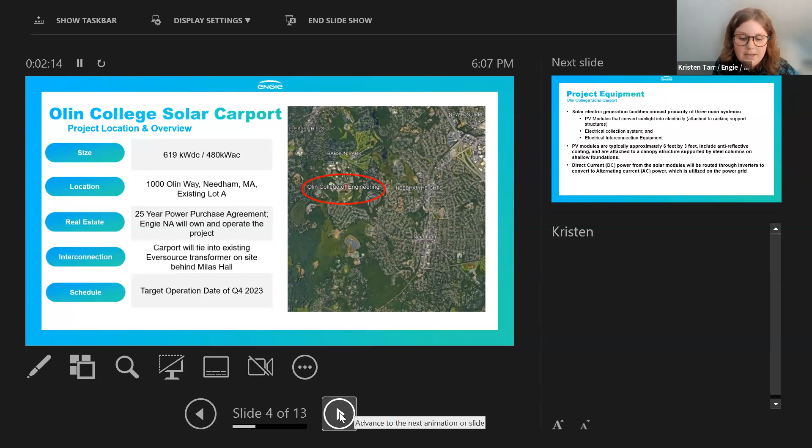So we're really excited about this project. Olin is really excited about this project. This is going to be a really big pillar of sustainability on the campus, and it's going to have interactive components for students to use the real-time data and include it in the learning curriculum.

The project is going to have PV modules, a solar racking system, as well as our interconnection equipment. We're going to use anti-reflective coating on our panels and steel columns for our racking, and we'll feed the power through to the transformer behind Milas Hall.

It's going to be a living classroom for students, allowing generation of clean and renewable energy for Olin College. This project is in line with the Massachusetts Climate Action Plan, Needham's Climate Action Plan, and Olin's Climate Action Plan, both still under development, and this is a great way to kick those off. It also provides covered parking to students through the weather in Massachusetts, and improves stormwater quality by capturing precipitation before it hits the pavement.

I'll turn it over to Phil to present on our wetlands.

Sure, can you hear me okay? Yes, we can. Okay, great. SWCA had a wetland scientist delineate this site in January 2023. This is a delineation map that was in the application.

The two wetland areas in green are BVW. We refer to them as wetlands 1 and 2, with 1 being the most south and 2 being to the east. We also field-estimated an isolated wetland—we didn't have permission to survey it, and it's actually within the town of Wellesley, but within 100 feet of our project site. That's the one in yellow, to the west.

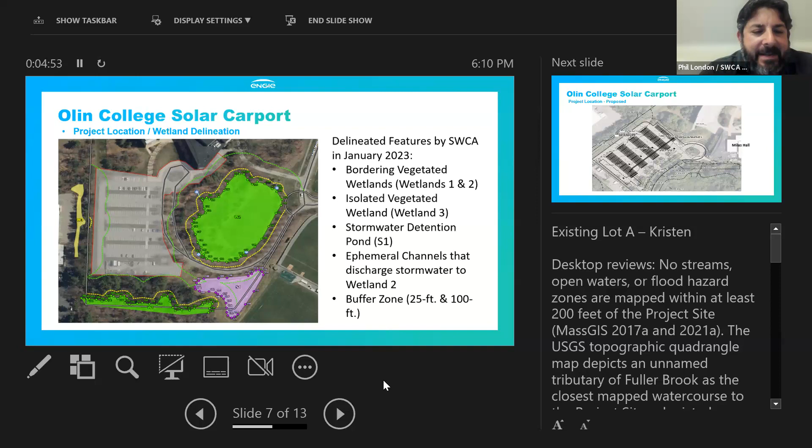So the 25 foot is the yellow dash, 100 is the green dash, and the purple is the detention basin. Correct. All right, got it. Trista, I don't know if I can actually change the slide—can you just hit the next one?

Okay, so this is the actual plan for the project. You can see the solar carports, there are 5 of them in the parking lot. Associated with that, there's going to be some trenching for conduit, which also goes to Milas Hall. You can see maybe a 35-foot corridor where the roundabout is—yes, exactly right there. So there's going to be a trench going right down the center of that, which serves as the tie-in to the existing electrical system.

So, I'm sorry, the solar panels are over the existing parking lot, is that correct? The only thing that is not in the parking lot is this conduit we're just talking about, and that part is adjacent to a walkway—it's a grass area with landscaping.

So really, the primary reason we're here is because there are little bits that are in the 100-foot buffer zone—some of the carport in the parking lot on the northwestern extent. You can make it out on this plan, it just clips the edge of the carports. And in that landscaped area we were just talking about, a little bit is in the 100-foot buffer zone as well. I should note, we're not within 25 feet, and we're not within the 50-foot buffer zone that the local bylaw specifies. How close are you?

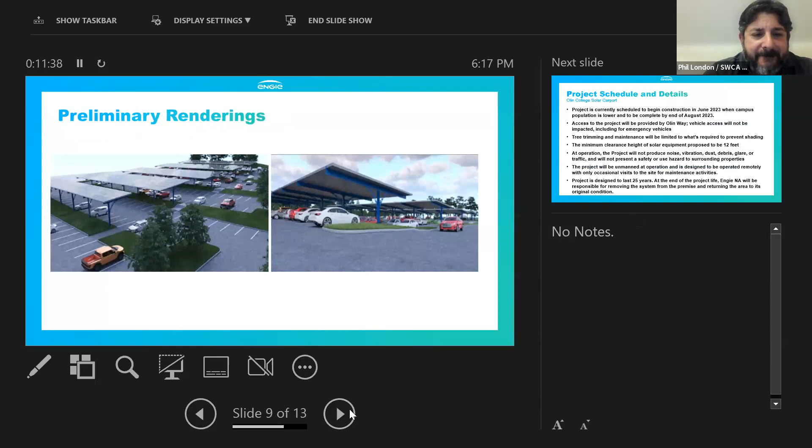So I know we have a couple other slides, but we may have kind of covered everything. That's kind of what the renderings would look like, the carport. Great. And this just talks about the project schedule. They are looking to start kind of in June and go through August.

Trying to see anything relevant. I talked about the stormwater controls, but we kind of already talked about that.

I did hear earlier that these solar panels are going to improve water quality, and I was curious how that was going to happen. Well, it's just that the carport will intercept the water before it hits the pavement, so that'll be connected into the stormwater system. So the carport, since it's a solar panel, will have a gutter system on it? Correct, they'll have a gutter system that'll collect it and convey the water into the existing system. So the point is it'll intercept it before it hits the pavement with all the pavement stuff. Great, okay.

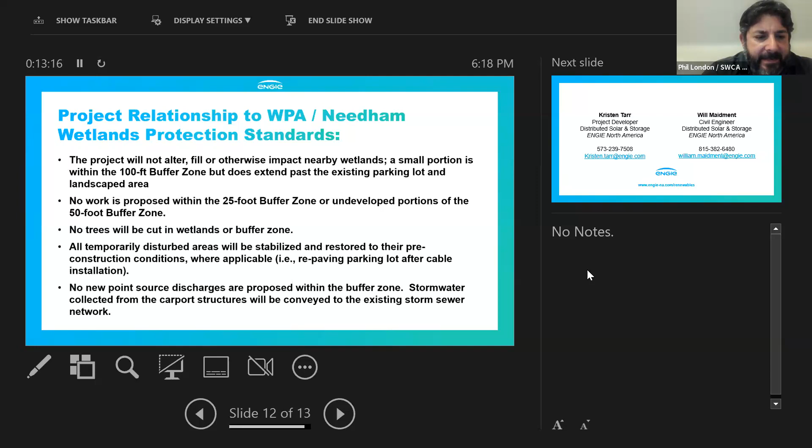And yeah, this is our last slide. It's really just reiterating everything we talked about. We're not going to be altering a resource area. We're going to be in the outer 100-foot buffer. There's going to be no trees cut into wetlands or the buffer zone. All temporary areas will be stabilized and restored to their pre-existing conditions. And there's going to be no new point source discharges associated with this project.

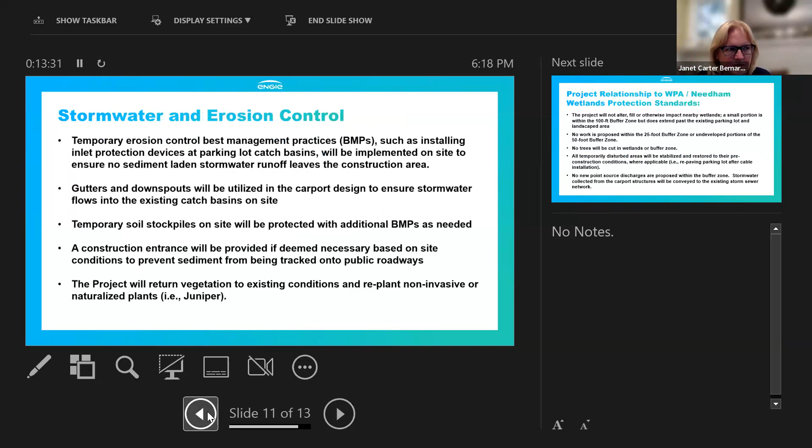Was one of these a photo of the area where the conduit is going to be dug in the buffer zone? There's no photo of that though, right? This is just a sketch that is aerial based. Okay.

Clay or Deb, I think Clay maybe went out or discussed this? Where's Clay? Oh, there you are. Do you have anything to add? And did you take any photos? I don't have any photos ready of the site. The work itself is pretty minor.

I think the RDA is fitting. The only concern was just about making sure that the stormwater is managed, that the outflow, I know you're directing them towards existing catch basins and that discharge already exists. But I think these are going over pervious islands, so just making sure there's no scouring or anything that's going to occur at the outflows due to any increased stormwater.

Does that make sense? We can't hear you, Phil. Are you talking? Yeah, I think Clay was just concerned about increased runoff going to the islands due to construction, so I was having trouble hearing a little bit. Just making sure that any increased stormwater from the newly installed carports, I imagine it would be relatively negligible since they're going over primarily a parking area, but since they are going over what appear to be pervious landscape islands, just making sure that we're not causing any scouring at the discharge point. So adding riprap or something if over time there is any scouring. So just monitoring of that outflow to make sure there's no long-term impacts.

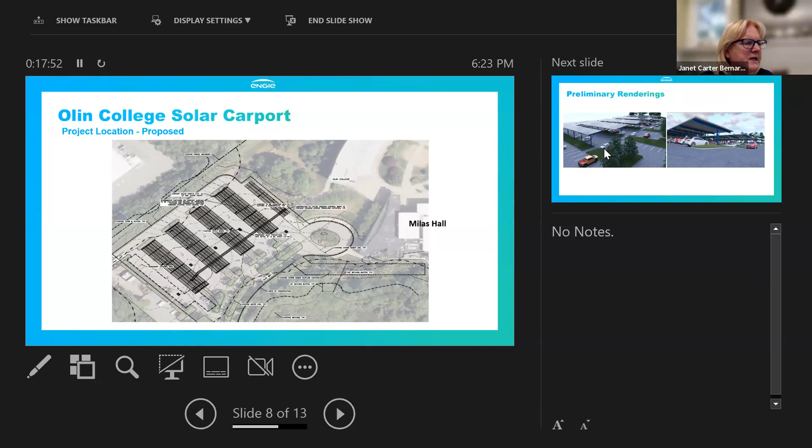Not hearing her. Who are you asking? Allison, she's having issues. Clay and I are trying to work with her. Did I get everybody else? And anybody in the audience have any questions, concerns or statements? There are no raised hands. Okay, and your team is satisfied? You've all said your piece?

My only concern is making sure that any erosion control, if needed, is there within that easement line. Because it's not clearly shown here, it might not be needed, but that's my concern. Okay, so everybody said their stuff, so Janet, yes.

How would it work with Wellesley? The applicant will need to go to Wellesley and do a similar process as this, asking them for a request for determination of applicability. If we issue a negative determination, they can do the work in Needham, but it's up to them to go to Wellesley for any work within Wellesley's jurisdiction.

Okay, did that make sense to the team? Phil, if you're talking, I can't hear you. Yeah. I've had this situation in the past, and I'll definitely follow up with Wellesley as to whether we actually need a filing when the work is not in this town.

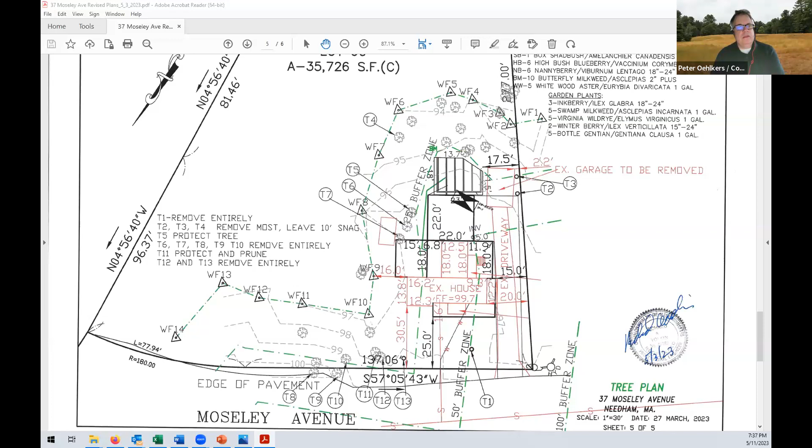I just was looking at a planting plan, on sheet 4 of 5. Oh, you see the legend. Maybe that's what I'm looking at. It's just the legend. Oh, you don't know where the plants are. Yeah, we talked about this before. We don't see the trees, we just see the legend.

Yeah, the trees were on there on the last plan. So, George, weren't they? Because we talked about that the last time too. So the trees, I had gone out to the site and identified some locations. They were on the past plan. I apologize that they weren't carried over. Yeah, we had brought that up the last time. Peter mentioned it before that there was just a legend and no new trees. So we definitely should show where the new trees are gonna go if you're gonna take away these other trees.

So those trees are all gonna be in the area off to the side, 25 foot off to the side. That was really the only area I could find that had the space for the trees.

Okay, Peter, we'll come back to you again in a minute. Stephen, anything about the deck?

Nothing about the deck. I'm wondering if there's a plan that shows, are we putting markers at the 25-foot no-disturb zone? We can do that.

I mean, a site like this, especially, this is a developer building it to sell to somebody, and the new homeowners are not gonna know anything about the wetland area.

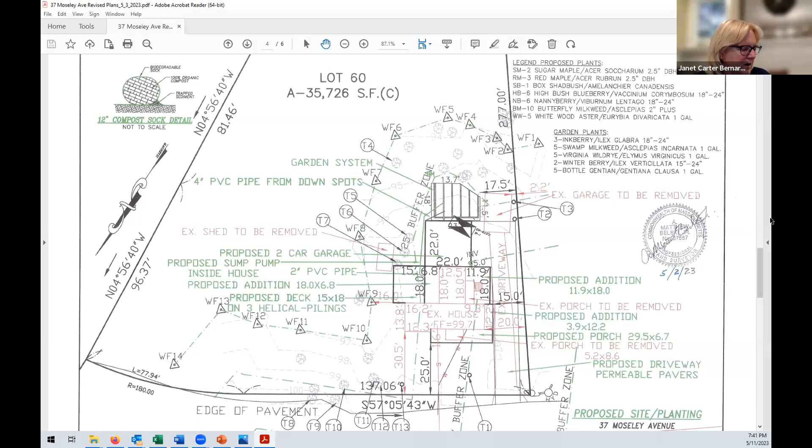They're in the wires anyway, they're really in the wires, and they're not that healthy. I think they were all Norway maples, maybe. I've kind of forgotten, I might be wrong.

But so we still need a plan, and then the rain garden is now moved outside. Do we have calculations for that rain garden, and has it been stamped by a professional engineer?

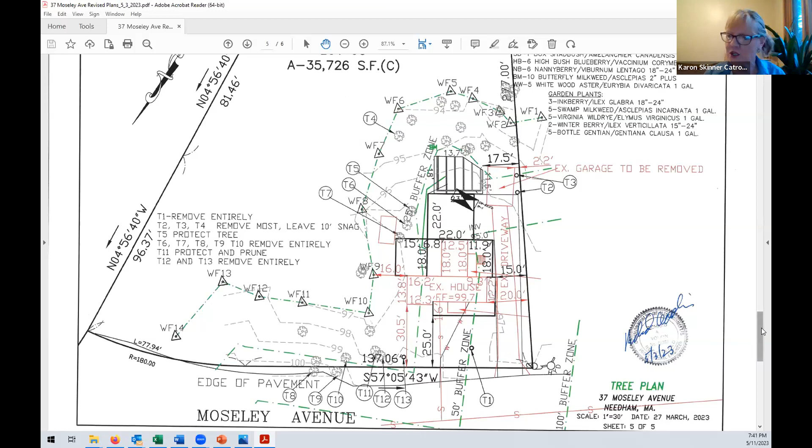Oh yes, that was Richard Volkin who stamped that, and he also did the soil testing. You asked at the last meeting who did the soil testing - he did it, and he's a soil evaluator.

Where are the... okay, so these are the calculations for changing the view. So sheet 3 of 5 is the soil test log, the rain garden system, the footprint of the building with the calculations.

We will do a double check on that. I think Dave is looking at that, and it's stamped by my engineer. So the impervious area has been confirmed, the erosion control line has been confirmed, soil testing got confirmed, the root zone is using...

You said the tubes for the garage. I believe that does make sense. Is the garage - so the grading for the garage - is it higher than the existing grade, so what will be the elevation of the garage?

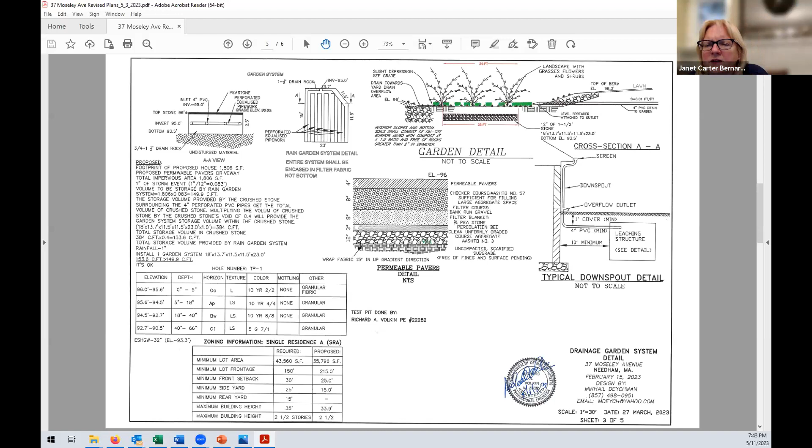Janet, to answer your question, yes, the garage will be higher than the existing grade. And in order to do the garage and protect the root system of the tree, what we're going to do is sonotubes on the back around where the roots are. Then on top of the foundation, that's going to be on the front and sides, we're going to do corrugated steel and then pour on top of that. So the roots underneath the garage will not be disturbed - we're trying to do as little impact as possible to that tree.

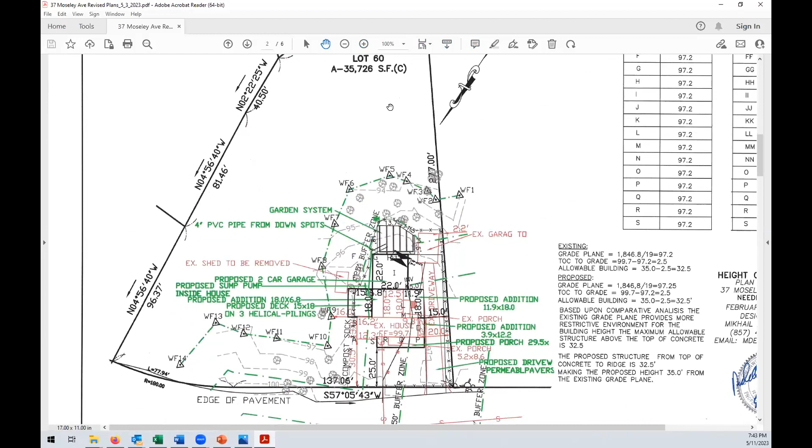Great, thank you very much for that. No problem, that's great. So did you say what you wanted to say there? Great, oh great, okay good.

I agree, second reading, okay. Revised plans are uploaded for review. So one thing that staff noticed was that the check you wrote for the fee waiver is dated January 2022, so we will need a new check for work within the 25-foot no disturb zone.

My guess is the commission will vote on it, but because of the amount of work that will occur there, that it's not just plantings, we will likely not waive that fee, so we will want a new check. So one thing Steve talked about was markers - putting markers at the 25-foot no disturb zone.

We have done different things for markers in the past - sometimes they are birdhouses, sometimes boulders, sometimes a fence, sometimes granite markers. You can tell us what you want for a marker, and we would like to see where those markers will be on this plan, because it does kind of zigzag around. From the commission's point of view, the 25-foot no disturb zone is where we would like these markers compared to anywhere else - is that a true statement?

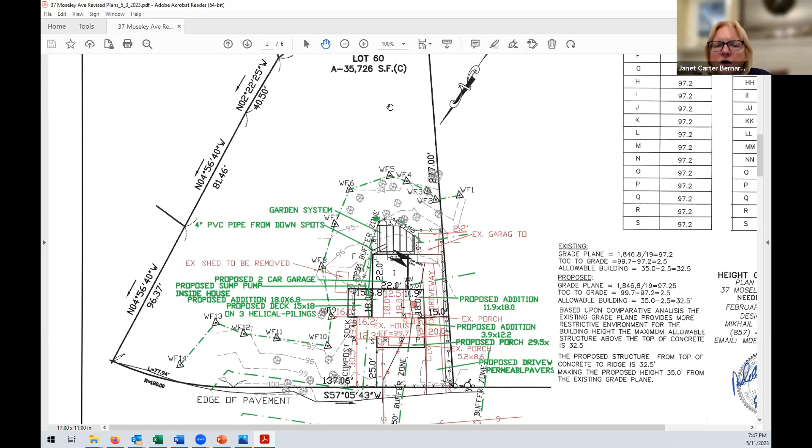And we just got the arborist report. So really, I think the plan is getting much closer. If we could just have markers and trees and plants underneath, and is there anything else?

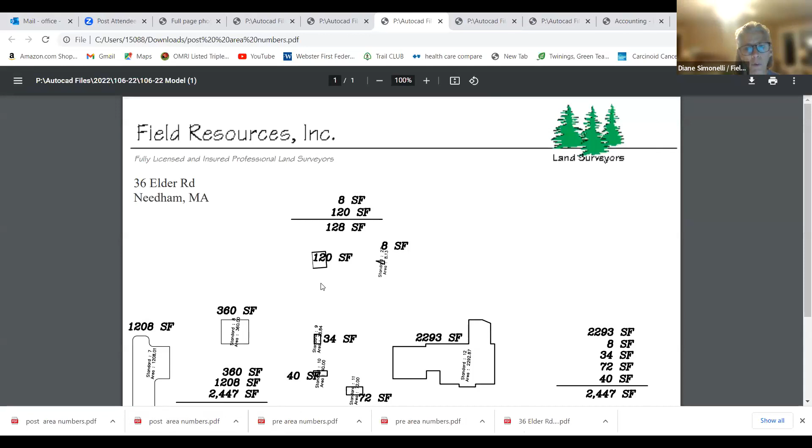And with that, we kind of broke it down a little bit more in the sense that we have the existing house minus the pervious patio and walks. We also have the driveway. This is existing or proposed now? This is the proposed.

So with that, we have the house at 2293. We added 8 square feet that we took off the house because that was actually in the buffer - we broke this down based on the 100-foot buffer to the BVW. 34 square feet is the bulkhead, 72 - honestly I forget what that is for - and then front steps or something, and another stoop in the back, and that comes out to 2447.

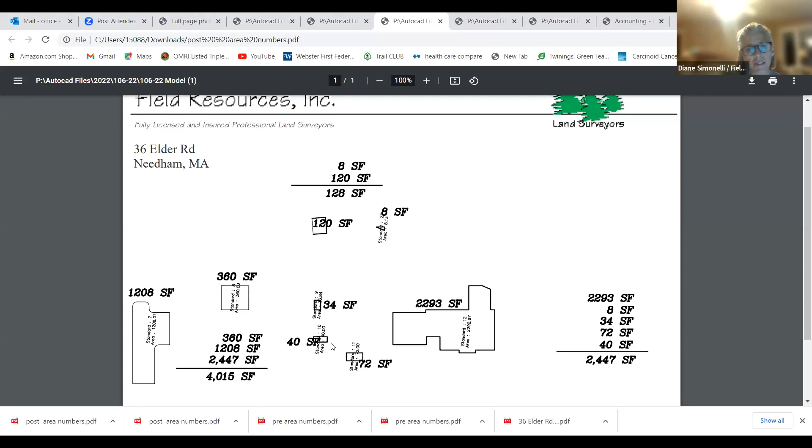So again, if we look at the numbers, let's go back. I'm sorry, that was a little confusing because I wasn't sure. You have two sets of numbers - can you identify which each one of them means again? Sure, let me just go back. I think we've understood this one.

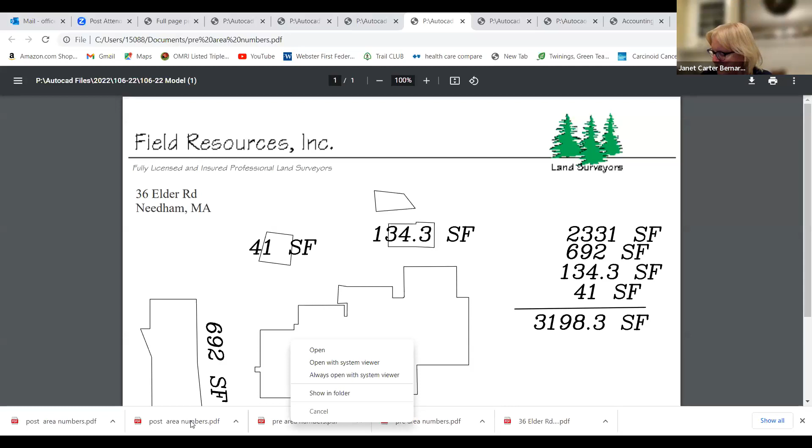Do we understand this one? Because it's 3191 existing minus the 41 that we don't agree with, so we're at... no, I didn't do that right. 3198.3. Well, it's not 3198 because you're subtracting 41. Right, so it comes to 3157.3. Okay, that's better. So existing, we have 3157.3. Got it, right.

So again, we go over here to these are the calculations for impervious in regards to house and structure. Is that proposed? This is correct, this is proposed. So you're... sorry, look, I'm sorry, you're right, I'm looking at the wrong list.

This one here is slightly different. This takes into account the original patio, including this patio, which again we've made pervious. So this was a previous calculation including the patio, which now is pervious. So the 360 is now pervious patio. Correct. And the 1208 is the driveway. But that's impervious.

No, that is not pervious pavers. The driveway also, no that is impervious. I'm sorry, I misheard you. Okay, yeah, so then we have...

So we have the house at 2293 square feet. Then let me just make sure I have my numbers right here. It seems like the calculation on the left-hand side, you would just be subtracting the 360. Is that correct? Right, I think.

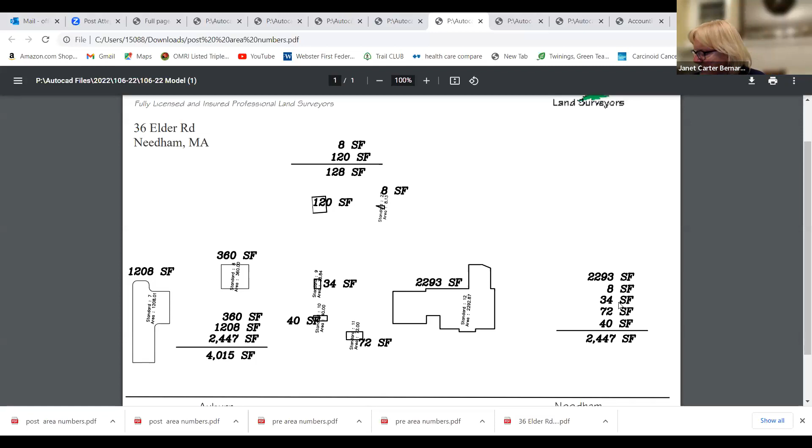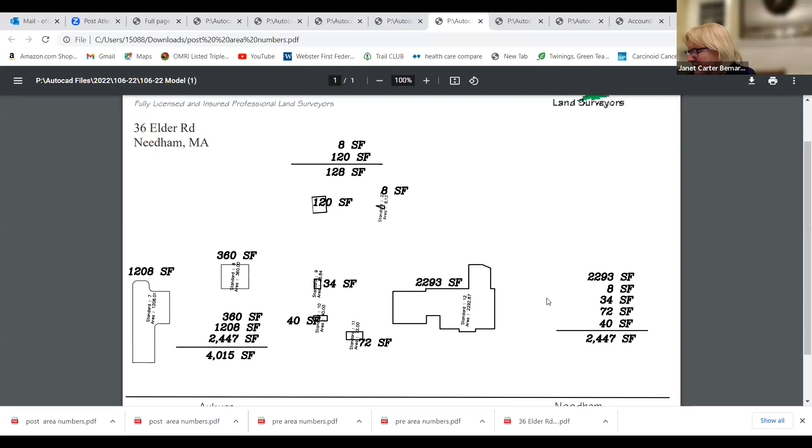Okay, so that's proposed, 3655. Correct, the existing was 3157. So the difference, is that what we care about now? Correct. So the difference is basically 500 square feet, 497.7. Does everyone agree with that? Yes, agree with that. Okay, so can we just say 500 to make our math a little easier? Sure, okay, so now what happens?

We have 500 additional impervious area. Right, so then we'll go to the plan that we have. The proposed plan had 470 square feet in this area. Additionally, we have this little part that was unvegetated, edge of lawn, approximately 500 square feet of area that will go back to naturally vegetated area. And Clay, is that the idea, they take whatever additional impervious area and give back 1-to-1?

Generally for redevelopment, when you're over 10% of the lot as being degraded, in this case impervious, we're looking at impervious numbers. But it's not degraded, I mean it's not 10%. Okay, so more than 10% of the lot is impervious or degraded? For impervious, I believe the regs bounce back and forth between degraded, which has a very finite definition, and previously developed. The way DEP handled the last appeal primarily stuck on impervious in a case like this. So we look at the net increase, it's over the impervious on the lot under existing conditions being over 10% of the lot size. I think about 16%.

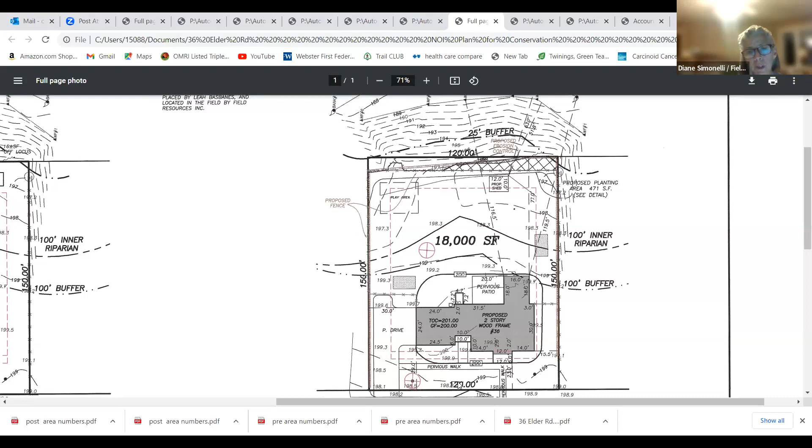So these are some of the items that can be removed from that calculation. But then the existing would also get removed from the calculation. So if you're gonna remove the proposed, you're gonna remove the existing, right? So could we just compare house to house?

So the argument being made now is that some of these areas in the current calculations for impervious surface are activities that would otherwise qualify as exempt minor activities. So I think what Diane is arguing is that if they removed the proposed shed and then came back in the future for the shed, it could come back as an exempt minor activity under a separate action, because it's more than 50 feet away from the mean annual high water.

But I think even if she does that, it's still currently impervious surface. So you cannot just take it away and say it doesn't exist if it exists - that's what I think. But if they took it away now and said okay, we're not gonna have that shed, so that doesn't count in the numbers.

And then they built this house, and then in 2 years they say we want to put a shed in, but the shed is now within the new 200-foot riverfront area, but it's closer than the existing impervious because now the old shed is gone. I don't think they're allowed to do that, are they?

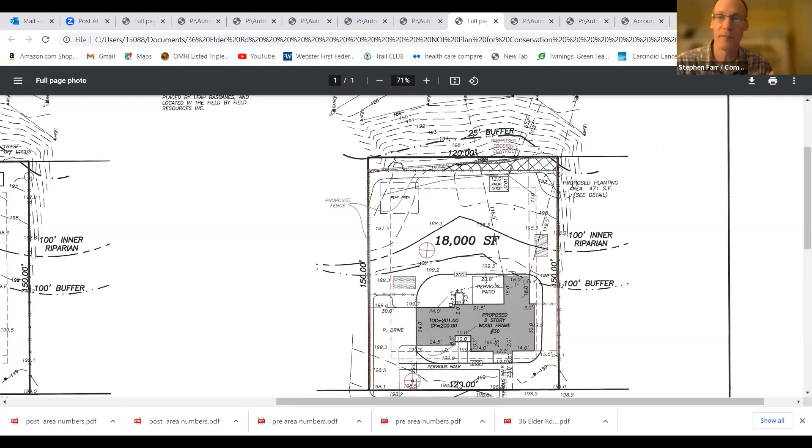Well, we can put monuments up on the fence. Yeah, we could put markers. Okay, so again, usually we put these markers at the 25-foot buffer, they kind of mean something. There's a different set of markers we're gonna use. Well, the markers aren't specific to the buffer. They say conservation land or something, don't they? Correct. All right, so I think we could put markers up, 3 markers, on the fence.

Because otherwise, what would you suggest? I don't have a good idea. They could do the same thing, take all those out. At least the markers give you some warning, right? As long as they're there.

And do we have, this is an order of conditions that would go with the land, right? It gets recorded somehow.

Well, that's one thing, honestly, as the board, I would love to see, when you record the order of conditions, it's obviously required, and I know the order is really what you're supposed to follow, but the plan, I feel, if you get an order, without bugging Debbie or Clay or other agents, it would be lovely if even an 8.5 by 11 sheet of paper is recorded with the order. Just for people, it doesn't have to be large scale, just because it goes along with the write-up, and most people don't read through the whole order, honestly. Right, right, I agree, you look at the picture. That's really a pretty good idea to do. Depending on the sheet we get, sometimes we'd have to make it small, but that's something we can definitely think about, and we'll definitely reference the plan in the order. Definitely, we just don't necessarily attach that plan, but that's not a bad idea.

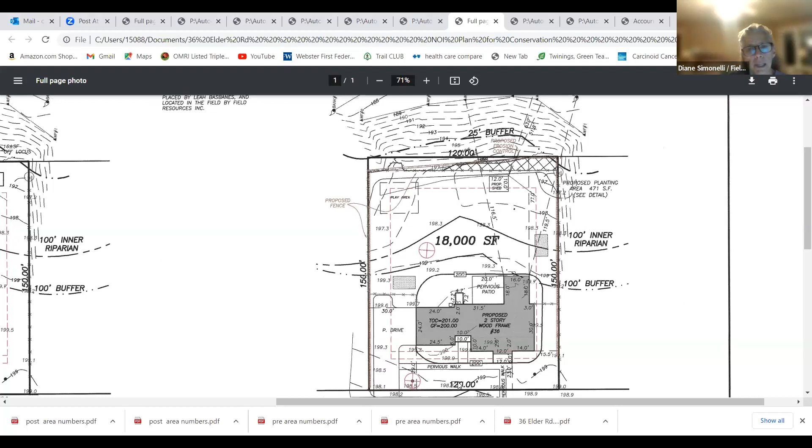Okay, every foot counts. Paulina, anything else? Sue? It sounds good. I would just like, if people are comfortable closing the hearing tonight, I would like to say we need a plan showing what this is, and I would like it to be at least 3 feet from where it is right now.

Okay, 3 feet. So if we condition a new plan, how many markers did you want? Just 3 on the fence? Yeah, a property line marker and one in the middle, and a straight line. Right, well, I'm gonna add a little bit, and I'll add a couple more plantings as well, to beef up that little notch out.

To the plan - I know it's been a little bit, I don't have it on my screen this evening, but you did get a planting plan. I can update that with the proposed planting area, a couple additional plantings, and I will show the placards as well. I'll put them on the plan.

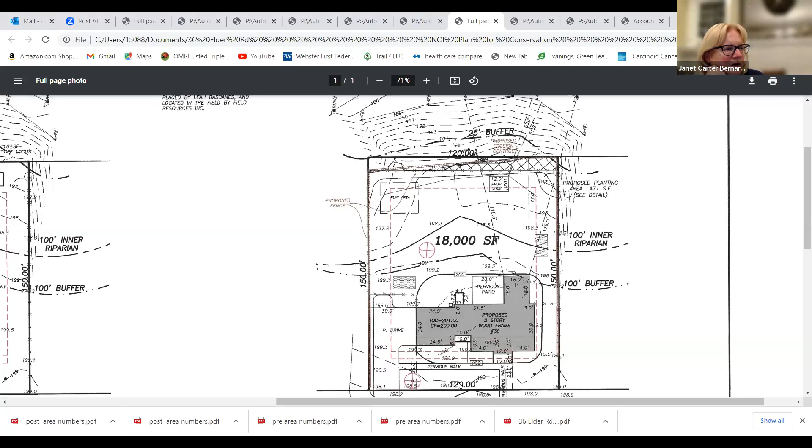All right, great. Anybody else? Anybody in the audience have anything to add about this? There are no hands raised. Okay, so anybody else, or are we ready to continue this hearing till May 25th?

I move that we continue 36 Elder Road to May 25th. I second. All in favor? Peter, aye. Paulina, aye. Sue, aye. Stephen, aye. Yeah, aye. Great, thank you very much, Diane.

Okay, and I do have one question, Deb. Is that meeting on Monday night for anybody or just commissioners? No, it literally says not for the public. So maybe you could hang out with the community. Yeah, I'll report back. Okay, again, thank you for your time this evening. Thank you, bye-bye.

Okay, where are we at? Oh, we did Olin. Okay, guess we are at 334 Meadowbrook Road, DP. Oh, we do not have a file number for 34 Meadowbrook Road yet. We can discuss this, open the hearing, but we cannot close the hearing. So is there somebody here?

I have my cheat sheet. Brett Reese - I'm here. Ah, Susan McCarthy - haven't seen. Did I get your name right, McCarthy? McArthur, yeah, and it's 34 Meadowbrook Road, not 334. Thank you, 34 Meadowbrook Road. I need somebody to be paying attention to what I'm saying. And Brett Reese is here from the homeowner. Great, thank you very much. All right, please have the floor.

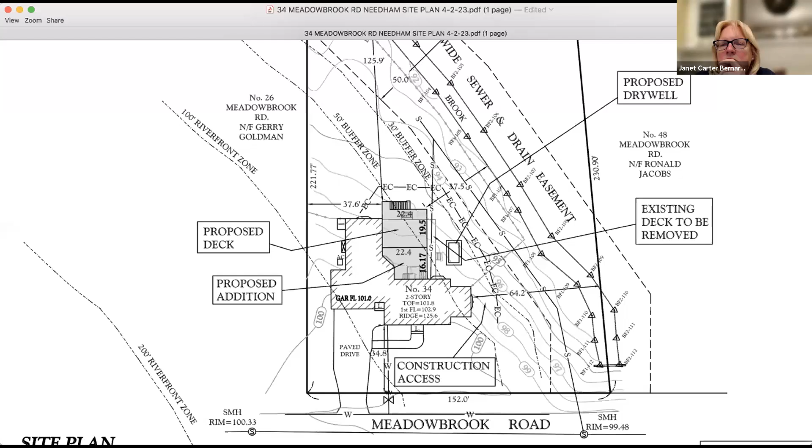I think it would help - would it be okay if I shared my screen? Yes, okay. Assume that you have heard this whole discussion we just had about riverfront and how that may or may not impact your project. Yeah, I've heard it. I'm sure we'll get to that.

Topography at the property gradually slopes down toward the river. The house is located around elevation 100 and the bank of Rosemary Brook is about at 92 feet. Rosemary Brook is a perennial stream. It flows through the back and the side of the property, and it is confined to a 10-foot wide concrete lined channel, as most of Rosemary Brook is. There are no bordering vegetated wetlands associated with it on this property.

So the proposed project consists of constructing a new addition and a deck off the back of the house. It's shaded here - the existing raised deck will be demolished. It's hard to see, but there's a slight line right there - that's where the existing deck is right now, and that's going to be taken down. A new 325 square foot addition is proposed off the back of the house, and a new 500 square foot deck is being proposed within the same footprint of the existing deck, as well as a little bit of lawn. The addition will be 2 stories with a full foundation, and no trees are proposed to be removed as a result of this project.

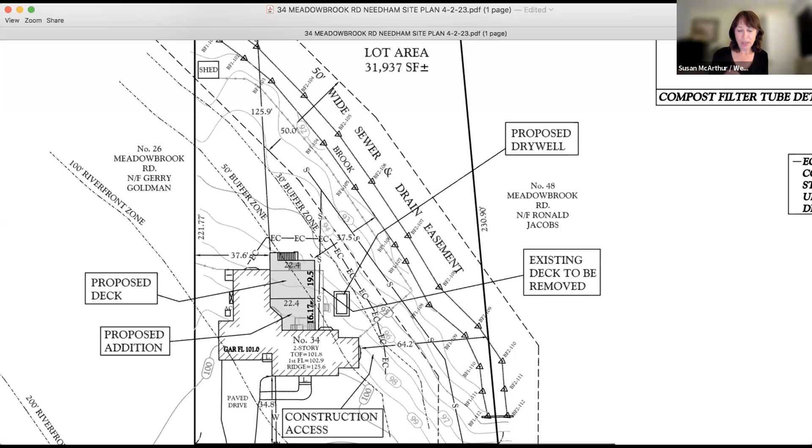A dry well is proposed to capture clean rooftop runoff from the new addition, and the gutters will direct the rooftop runoff to the dry well to provide recharge to the ground.

Are you only required to recharge the addition, or are you required to recharge any of the existing house? According to the Town of Needham stormwater regulations, there's a regulation that basically says if it's 25%, 50%, or 100%, depending on the size of the addition, depends on what you're required to do.

Oh, okay, that I would have to check on. I don't know, so check on the Needham stormwater regulations. I don't actually remember off the top of my head either, but I think if it's less than 25% of the existing, you just have to recharge the addition and not more than that. But if it's more, then you have to do more.

I believe that's correct, 25%. That they're less than 25%? Well, that's a stormwater requirement, 25%. So if it's under 25% of the existing structure, if the addition is smaller than that, then you only have to do the runoff for the addition. Okay, so you'll want to look into that.

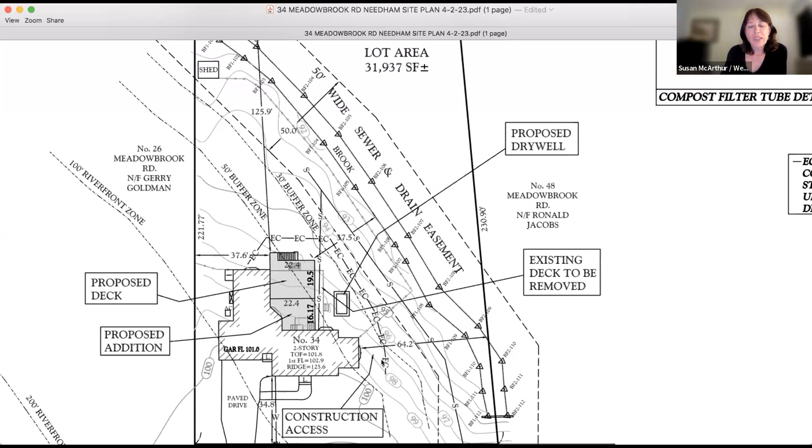Prior to any ground disturbance, an erosion control barrier will be installed. Construction access will be on this side of the house, just because it's kind of tight there, there's shrubs and whatnot. They'd probably have to take the fence down right there, but yeah, they would come in over here. I think that's it.

Anyone have any questions? So you're showing a 30-foot buffer. We have a 25-foot no-disturb zone. So we want to make sure your erosion controls and your access are outside that 25, that you're not disturbing anything within the 25. No, nothing's being disturbed within 25 feet.

I mean, if we could pull the erosion control barrier closer, but yeah, it looks like you should be able to be outside of the 25 foot, so no disturbances.

Commission members, we're also here. Stephen, do you have any questions? No comments.

Is there something like a waiver request? There is for work in the 50-foot. Right, so it's only a 25-foot. So the waiver should say 25-foot if you're working within the 25-foot. Oh, yeah, okay, well then I guess I didn't need to fill it out. Right, and the waiver said it's an intermittent stream, so. I saw that, I was like, oops. Yeah, but you don't need it anyway, so it doesn't really matter.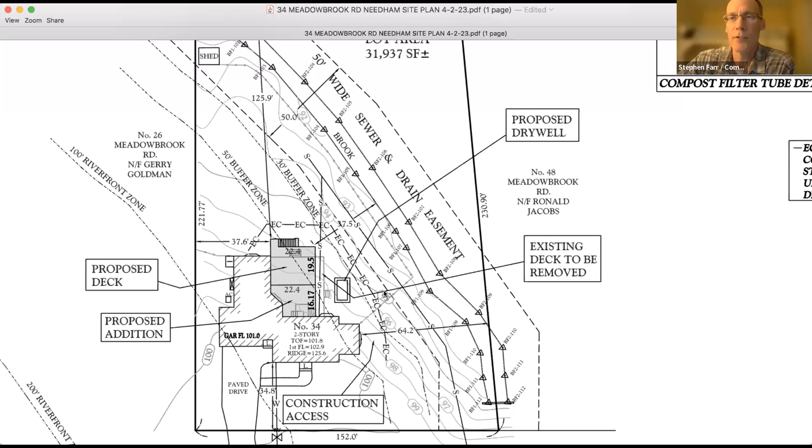Questions to the public? Questions in the public? Anybody in the public have anything to add? There are no raised hands.

Anybody from the commission have anything? Stephen, anything else? I move that we continue 34 Meadowbrook Road until May 25th. I second. I assume you want May 25th? Yes.

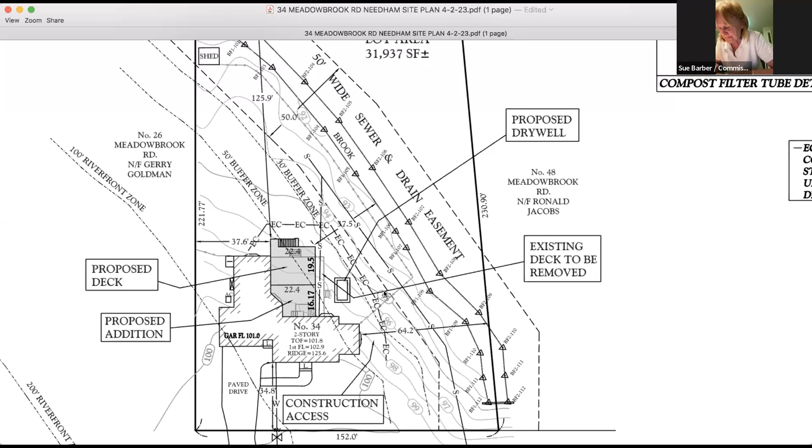We have 46, 50, 62, 94 Heather Lane, MWRA siphon structure project. I found that you have a DEP file number, 2340903. This is a notice of intent. Do you agree you have a file number? Yeah, you want to agree, just say yes. Agreed. So who is here on behalf of MWRA?

Michael Cunningham and Milan Horbachevsky, yes. Good evening, Milan Horbachevsky, Program Manager, Massachusetts Water Resources Authority. Thank you so much for having us this evening and for your patience. As you may recall, we met with you a year ago January and received an exemption that February for the 5 structures within the town of Needham.

Just a quick recap: this is the sewer siphon rehabilitation contract, in which we're rehabbing 40 structures at 30 locations in 17 different communities. 5 of those structures are in Needham, and like I said previously, we obtained the exemption from you. So what we're here for today is a notice of intent to utilize our existing easement to access 2 of the structures.

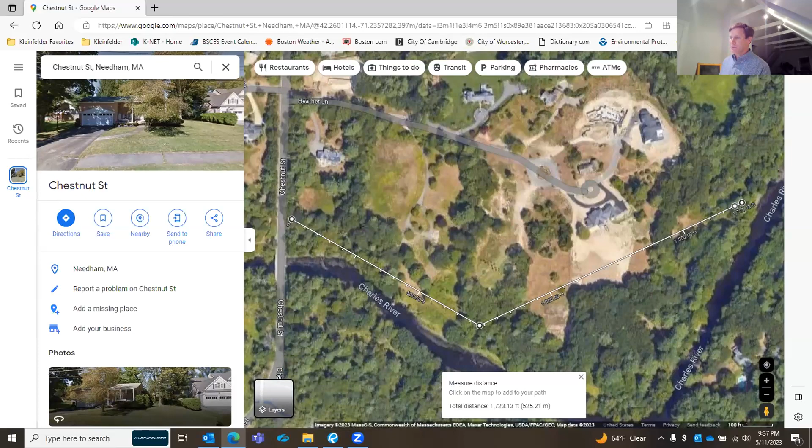When we made our most recent site visit in December, we walked the route and talked about the impacts, and how we'll attempt to avoid tree removals and things like that to the maximum extent. But we're trying to provide access to vehicles both for construction and for periodic future maintenance.

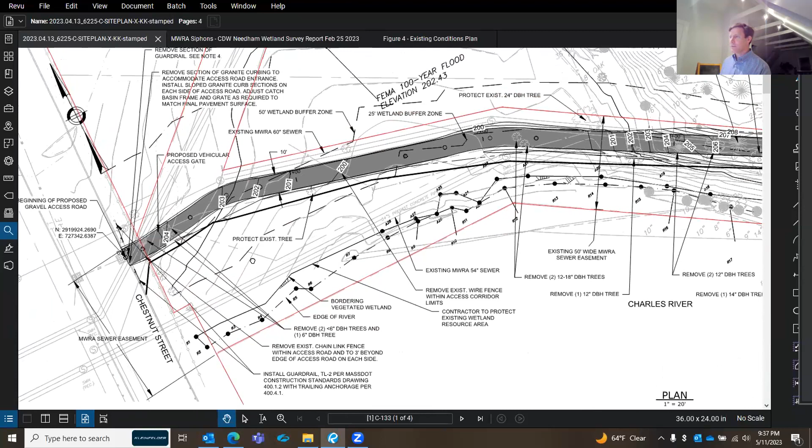Shifting to our drawings, having highlighted the MWRA easement lines in red, you can see from Chestnut Street there's a chain link fence where we would create an opening and a lockable gate. We want to create a gravel surface. Most of our sites use 13 feet wide, but for this one we decided to neck that down to 10 feet. We're proposing a 10-foot wide gravel access road within the easement, offset away from the wetlands and away from the river, while still staying comfortably within the easement and avoiding trees to the extent we can.

Unfortunately we're in floodplain for most of this, but fortunately the grading - we worked hard on this - enables a net increase in flood storage because there really wasn't much filling needed. So we tried to be a little conservative and do a bit of cutting with bumps and stuff along the route just to get a little extra flood storage and not have to haul out too much surplus soil.

Can I ask a quick question? Yeah. So in reading the application, the gravel roadway or driveway, whatever you want to call it, isn't going to continue behind the houses?

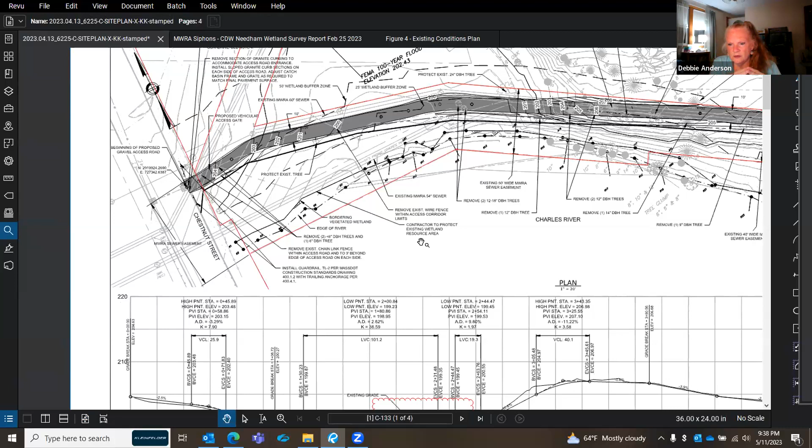Yeah, I'll jump ahead to that, Deb. So part of our original proposal was to never build a road behind the houses.

At the time when we first came out there, that was beautiful lawn, flat, cleared. We looked at that and said, well, we're not building a road there because it's traversable by all the different kinds of vehicles we could envision for maintenance. Where we need to build the road is where the grades, horizontally along the road, might be a little too steep for vehicle. We have to either fill or cut to level those out a bit, like your driveway. Also, where there might be a side slope that's too uneven, we're worried about vehicle stability. So that wasn't the case behind there, and it's still not the case.

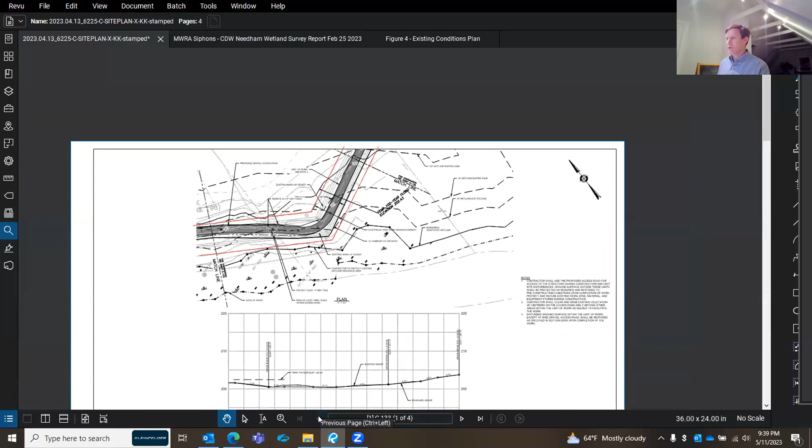We haven't modified the plan at all from that lawn heading east to the siphon structure, the plan we presented back in January 2022 when we were seeking a maintenance exemption. I drew a green line on this plan roughly to show where the new plan from the west ties into the old plan from the east, and nothing's changed east of that point. It's really about the need to use the easement all the way back to Chestnut Street and make it traversable by vehicles for both construction and future maintenance. The construction at the structures involves no digging, none of that. It's lining the inside, putting flood-proof openings on top to prevent flood inundation. But we've got to get there, and the MWRA needs to get there beyond that.

Just to clarify, I did talk to the owners of 64 today. They were concerned, they didn't really understand the easement they have and the rights you guys have over it that goes through their property. They wanted to make sure you weren't going to be putting a gravel driveway through what they claim is their property. So based on reading what you guys wrote, I told them you weren't planning on putting the gravel roadway behind the houses.

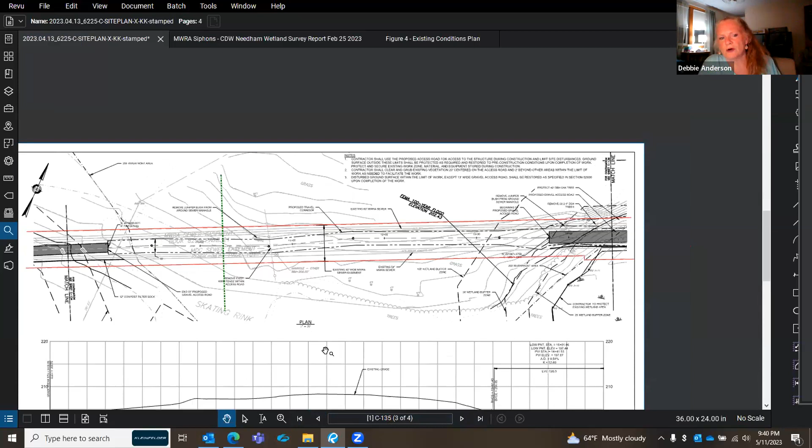So which property was 64? That's next to 90, was it 94? That's Kayer then, Milan. Yes, that would be Kayer. 64 is Kayer.

The concern there, quite frankly, is that we want to make sure Kayer does not extend any structures onto our existing easement. That's a concern of ours, we want to monitor that closely. Kayer should be aware of where the easement is, I've had several conversations with him. I actually happened to stop by the site today on my way home, and I noticed his house is up. From what I understand, there'll be a lot of terracing going down his property with different levels of structures, perhaps even swimming pools and tennis courts. But we want to make sure everyone stays constantly aware that you cannot impose upon our existing easement.

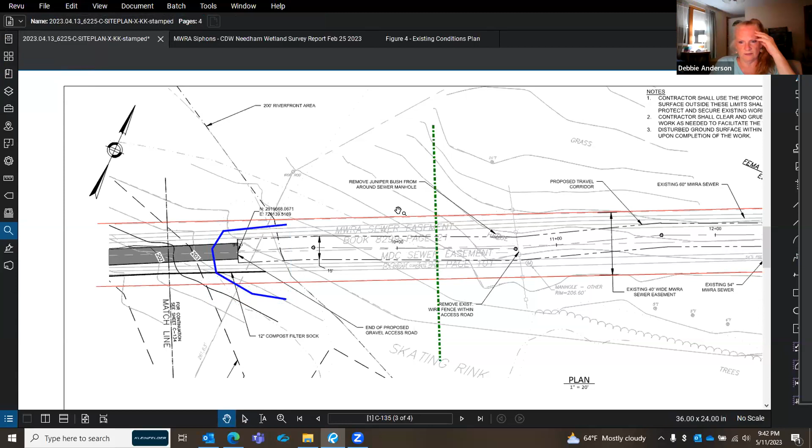Right, but you're not planning on adding gravel to that area? No, we plan to keep that green space along that property, as well as the property next door, owned right now by Colby, I mean Kemple. So those two properties, we will keep the existing grass as is. But we need to make sure those homeowners understand there is an easement they cannot build upon or encroach upon. I just wanted to make sure I was giving him the most correct information.

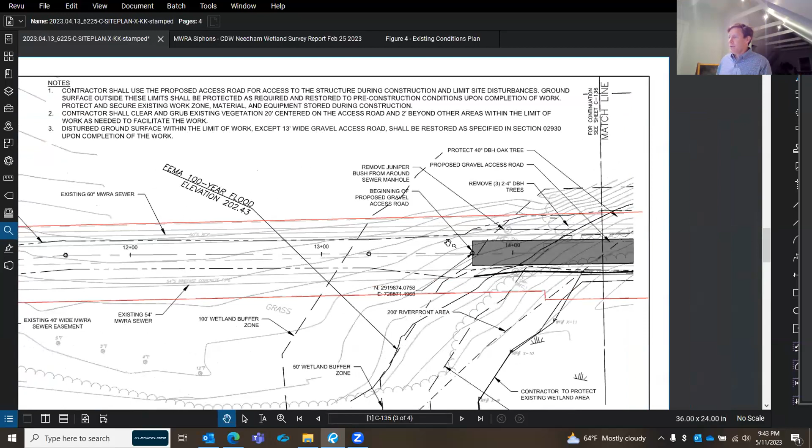If you were to walk west down the easement, leaving Kemple, heading across Kayer's property, the trees are already sort of cut around the easement like this blue line. So what we did was measure out such that we're terminating the gravel road within that screened area, provided those trees don't come down by others. It's within that screened area, so if you're a property owner up north looking down from Heather Lane, you wouldn't see the gravel road, it's screened off by the trees. It will transition to just a corridor, essentially a demarcation for the contractor to stay within this 15-foot wide corridor when traveling. MWRA will do the same, staying within their easement for future maintenance, all the way until you get within another screened area again, provided no one decides to cut more.

Once you get down the steep slope where the old swimming pool used to be, which is probably up here, so you can't see the gravel from those properties.

And of course, it's gravel, so how it's going to look 2-3 years from now, it won't look like a fresh gravel road anymore. There'll be growth coming up around it and in it. Our goal is really just to create a surface that can withstand vehicle loading, even though there will be growth, and MWRA is not going to mow it down annually. It's just like if someone drives a vehicle over a grassed area that has a good gravel base in it, it's not going to depress.

Have you had this discussion with Mr. Care, I would imagine? I've spoken with Care a couple of times regarding the project, because actually he was one of the people we were looking to obtain an easement through their private property. So he's well aware of the project and certainly has my contact information if he has any questions, but he should be aware that there is an easement running through his property.

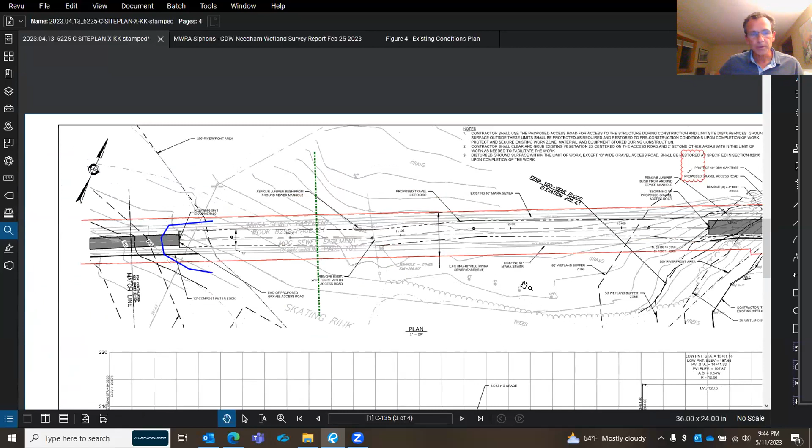Certainly we've told him so, and he'd be naive not to know that. We also met Kobe out on site, Kobe Kemple, and told him about that while walking the easement. So he's just as aware as Nick. Pierce still owns one property there as well, on the other side of Care. Those three we've kept in contact with several times and walked the site with them. Care, my conversations have been by phone, but I believe he understands the scope of our project as well as the easement in his backyard.

And how are you demarcating this line through their yards, some of the grass? You said you were demarcating it so the people aren't driving the truck permanently, not like with bounds? It will be, the contractor's obligated to do layout prior to mobilizing.

So they'll bring in a registered surveyor and they'll do layout of the existing easements, the limits of where the access road will be constructed. So they'll have their limits by which they know to operate within. But we don't want to set permanent structures in these people's yards. It will be easy for the MWRA because the manholes represent the center lines of the two adjoining 20-foot wide easements, so it's easy for MWRA to get their bearings when they're out there accessing in the future.

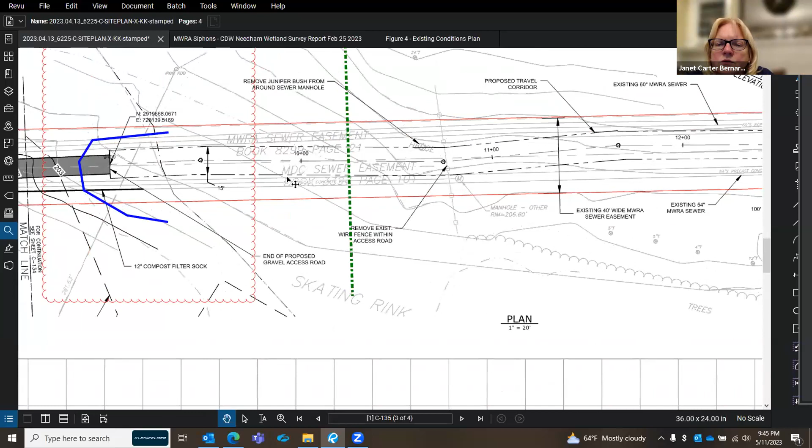So your question, are the circles on your plan the manholes? Yes, there's one here, and there's another one I was looking at. Okay, and then over here, there's another parallel set of manholes here and here. Have you field verified all of those? People conveniently planted bushes over some of them, but yes.

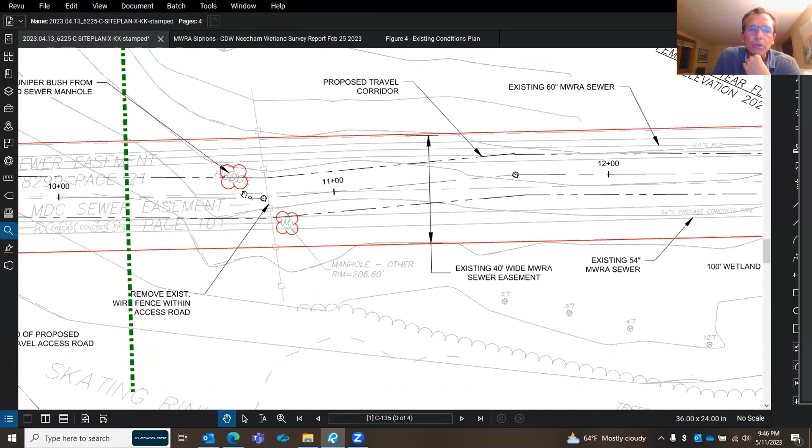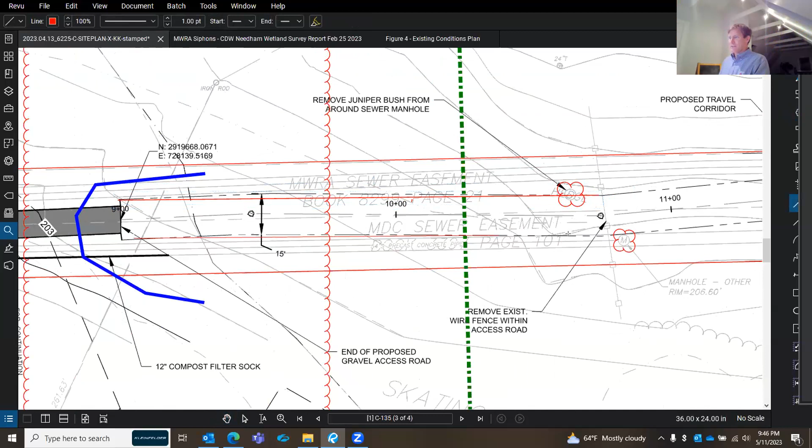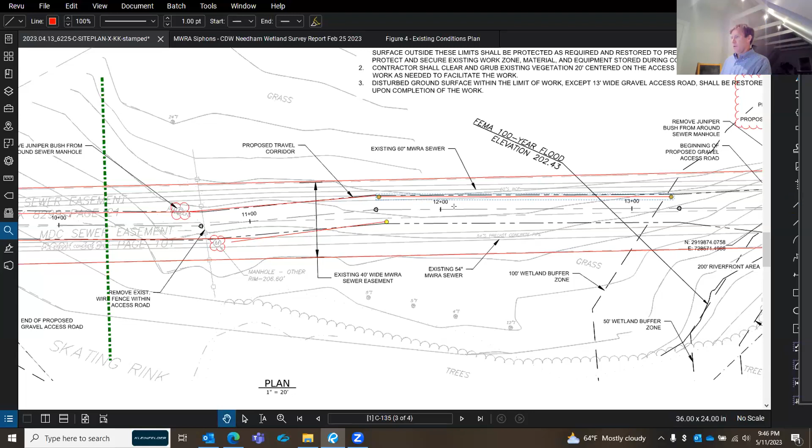Your question, Jenna, is a good one in the sense that even though we have a 40-foot wide easement there, we will try to keep the contractor to a limited area, perhaps similar to that 15-foot swath, so they're not necessarily running the course of the full 40-foot wide easement. Maybe even something like paint can be put down just to keep them in a corridor within that 40-foot easement. We're giving them a 15-foot corridor right down the center of the two 20-foot easements, so that we eliminate damage to the entire width of their lawn within that 40 feet.

Then, I feel like this maybe isn't a conservation question, but I'll ask it anyway: in 3 years, when this is done and somebody's just coming down to do maintenance, how are they going to know where to go? Are they just going to be on the gravel road, which would be kind of obvious because it won't be that overgrown? They'll know where the manholes are and see the other gravel road, and they'll basically make a beeline for it, not haphazardly driving over everything. It may not necessarily be that 15-foot swath we're intending for construction, but certainly they'll be within our 40-foot easement.

And we have to remember that this access for maintenance may take place every other year, and most likely it'll not be with a Vactor truck, which may come much less frequently, because as part of our project here, we intend to leave these structures in a clean, if not pristine condition, so a Vactor truck won't be making its way down there anytime soon. That would be somewhat infrequent over the years.

I never pictured a Vactor truck going down there. That's gonna happen every some odd years - maybe every 5, maybe every 10, as long as these are maintained properly. We're looking more at a pickup truck coming back and forth, perhaps on an annual basis to inspect these. So there isn't going to be much damage incurred over the years on those lawns.

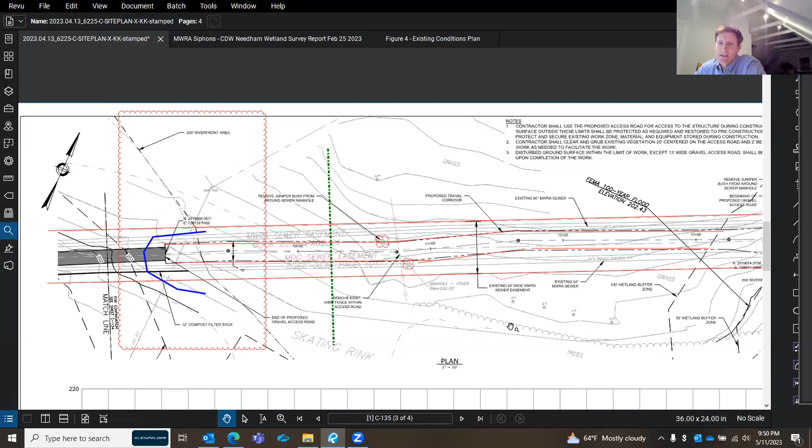You know, what did you list - the types of trees someplace on this plan? Just size. Yeah, when we were out in the field, I think we noted a couple that you had felt were not in great shape, as you recall. We may have only had one or two trees that unfortunately were being lost, but the rest of them were in poor shape. And certainly we tried to avoid as many as possible.

One thing we are doing here, just to be clear, we're not clearing our 40-foot wide easement. We're only going to clear what we feel is necessary for this road, which is approximately 10 feet, maybe 11, 12 in spots, to avoid roots and so forth crossing the roadway. We've made a conscious effort not to clear entirely the 40-foot width. Even though this growth should not have been there to begin with, we understand that we don't want to make a 40-foot clear path through here. So we're trying to minimize the impact.

And now I understand that this work is not under Needham's bylaw, but it's under the Wetlands Protection Act, the state regulations. But you don't - is that true, Deb? This is not, because it's a utility, doesn't fall under the Needham bylaw? Is that true? It's the MWRA's Enabling Act. Yes, so we're exempt through the Enabling Act.

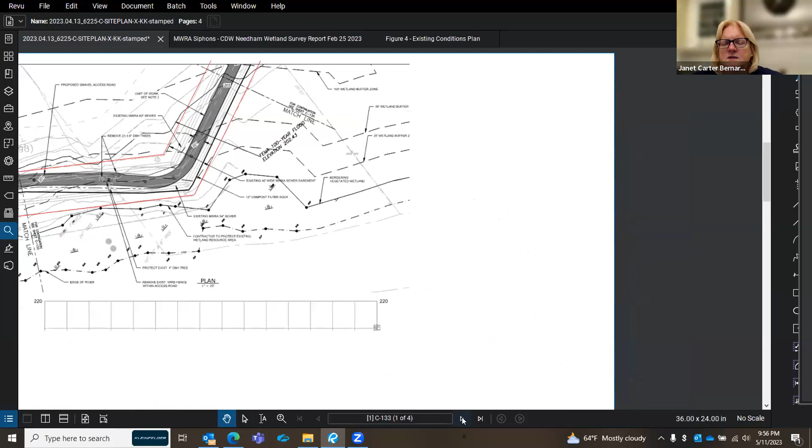And we would like to make sure that the property owner of, is it 62, 64? 62, yeah. Who has had opportunity to review the plans and input any concerns or comments they may have. I think Deb just spoke with them today, so we just want to make sure they understand.

I forwarded them the application and the plans. They appeared to me as though they really didn't know what was going on. Well, I'll make sure that I once again educate them on where our existing easement is. I want to make sure that they don't encroach upon that easement. That's first and foremost our priority, quite frankly.

And again, our priority is the wetlands, but at the same time, I think our biggest struggle is the removal of trees within the riverfront area. So we appreciate that you're a utility and that you have to access your pipes, and that you're trying to be conscientious and keeping it narrow and all of the rest.

We just want to make sure, before we close this hearing, that anybody in the proximity — now that Deb has also reached out to them, I feel like they can't say they didn't hear anything. We appreciate you discussing that with Kay or Deb, but I have had conversations with them on the telephone. He has not met me out on site, so I can offer to meet with him to give a better idea of what it is that we're doing.

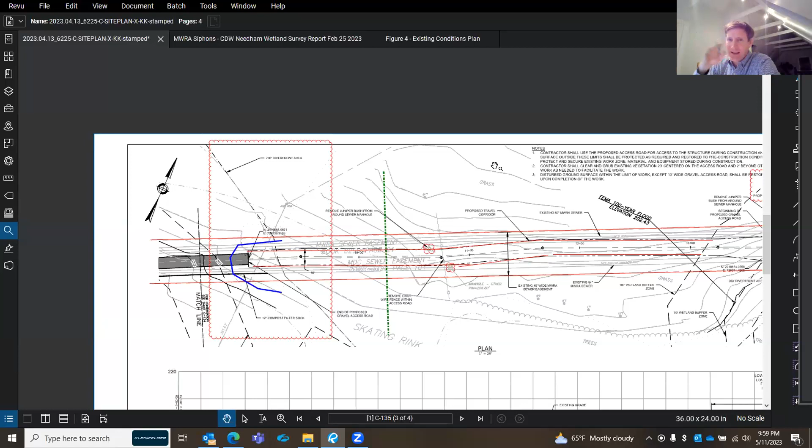Oh okay, we will want to correct that, revise that. Because they're just staying within this — I'm thinking, what is our site? We must have treated all the riverfront within the easement as our quote-unquote site. So is that the 19,137, your entire 40-foot easement all the way across? I can't say offhand. We will definitely rerun those numbers using CAD to calculate those up and make sure.

As far as DEP looking at it and seeing that you're disturbing all of the riverfront area — leaving no stone unturned, right? Yeah, we'll correct that, the impression isn't very good.

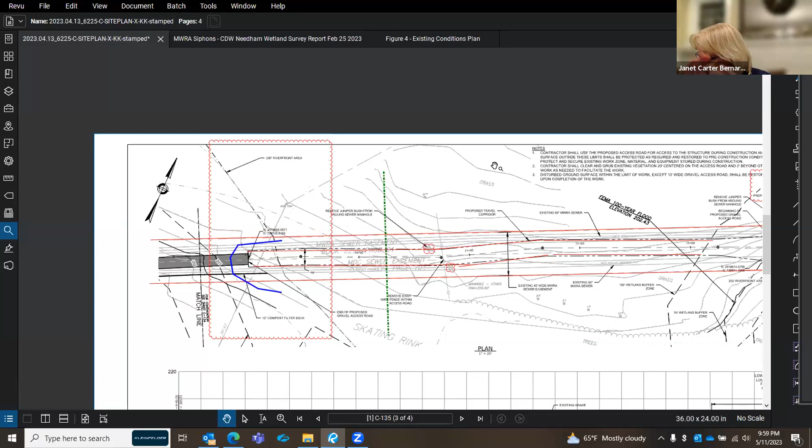So if you could check about trees. And we just want to confirm that all the abutters have had a chance to weigh in. Any commission members have any comments?

Stephen, no comment. Peter? Yeah, I like the shrub idea. It's keeping in the character of a lot of rights of way to provide that sort of habitat.

So you can come back to the shrubs when the abutters choose not to allow you to plant 24 trees in there. Well, even if they're not going to be maintaining the whole 40 feet, maybe there's an opportunity to put some shrubs within the easement itself.

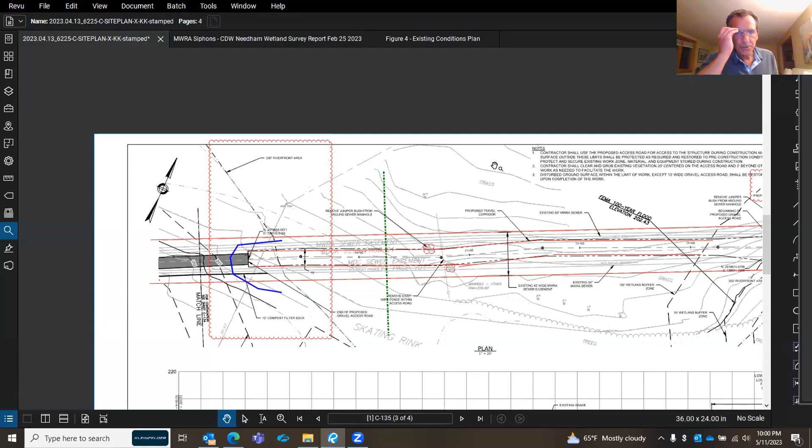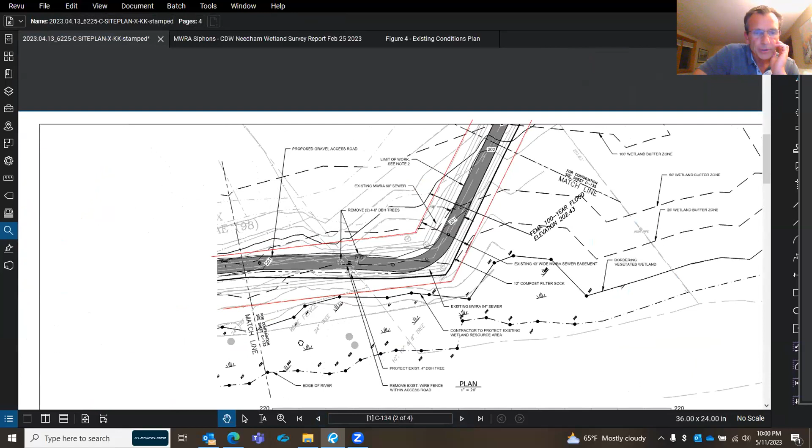I think certainly along the border would be preferable, because even though root intrusion from a shrub is certainly less so than a tree, some of our sewers are actually not that deep below grade. So the fact that we've allowed these trees to grow upon our easement is unfortunate over this time. But certainly some shrubs along, bordering the easement, I think that might be the way to go.

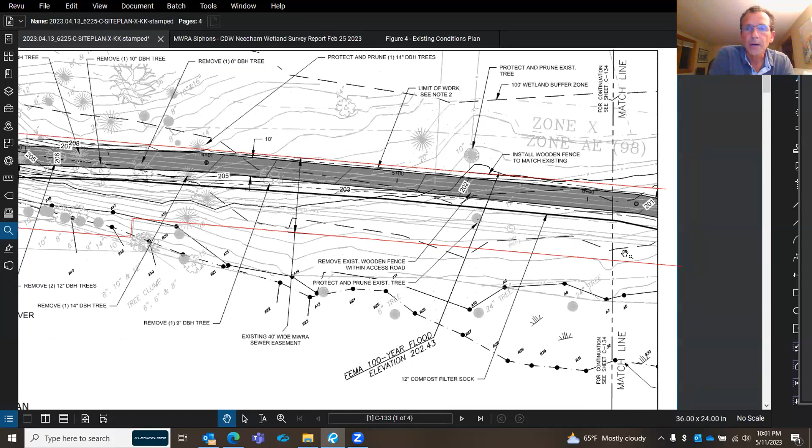And whether that's on their home side of the easement or on the far side of the easement, that'll be interesting to see. They may want it on the far side in order to keep their lawns. So we'll discuss that with the property owners.

Good. Helena, no comment. Sue, no comment.

Okay, anybody in the audience have anything to add? There are no hands in the audience. Is there anybody in the audience? There's one person, but they might actually be associated with this project. Thanks. Anybody on your team have anything else to add? They've all been very quiet.

Sorry for keeping you this late. Thank you for holding in with us. Anything else? So you're going to provide us with a new DEP form — trees, abutters. Are those the only things that we listed?

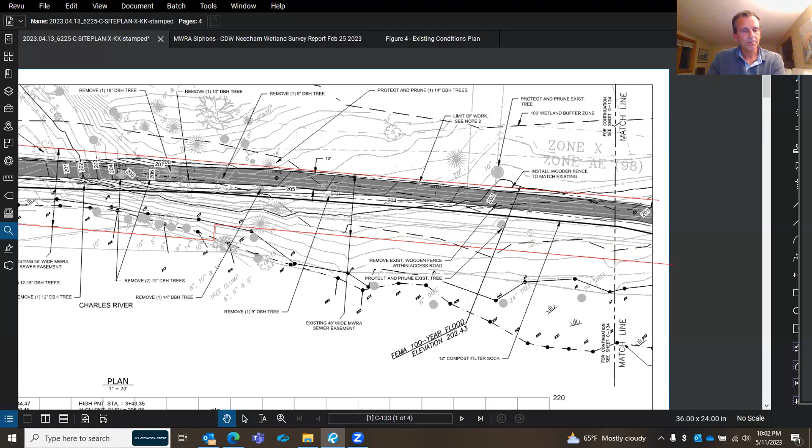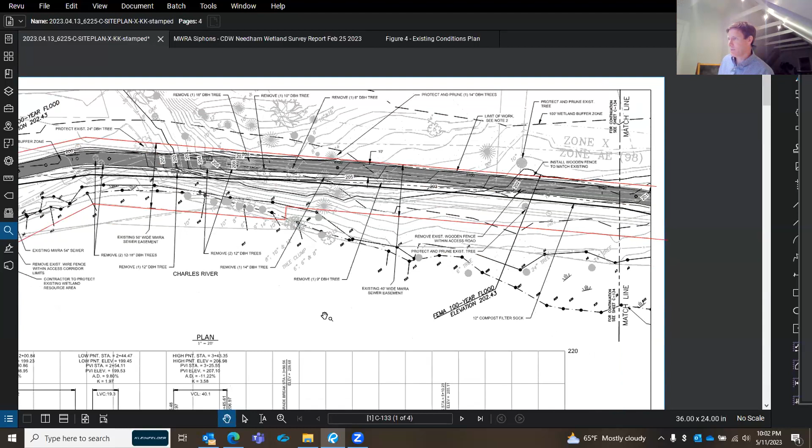There's erosion control in place - a 12 inch compost filter sock, quite a bit of it. There's some in BBW but that's just a temporary impact, at the very end of the project near the structure where the corridor gets narrow, near the river end.

If everybody's all set, we can take a motion to continue this to May 25th. You're continuing because you're going to provide us with the new form, tell us about the trees, and make sure the abutters have added whatever comments they want to have.

I don't know that we'll have a definitive plan for tree planting by that time, but we want to make sure outreach has been made to these property owners prior to that. I'll make outreach, but not necessarily present a planting plan - people will say whether they're agreeable to trees being planted, whatever they're agreeable to, and if they're agreeable to nothing, let us know that as well.

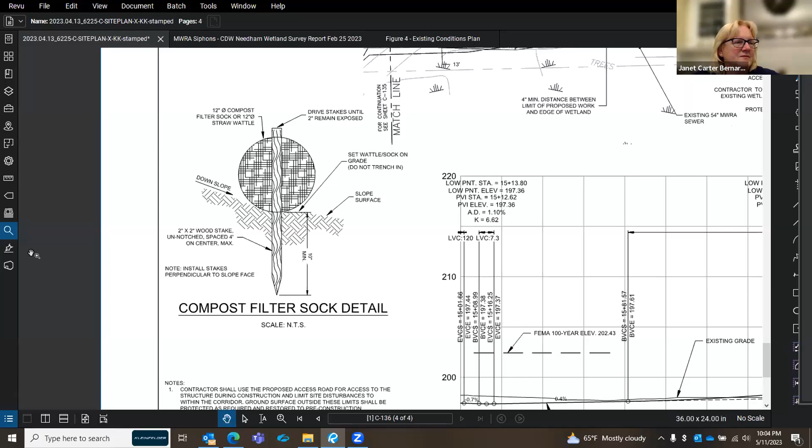Anything else, anybody? All right, I'll take a motion to continue till May 25th. A second. All in favor - Peter, aye. Paulina, aye. Sue, aye. Stephen, aye. Great, thank you very much.